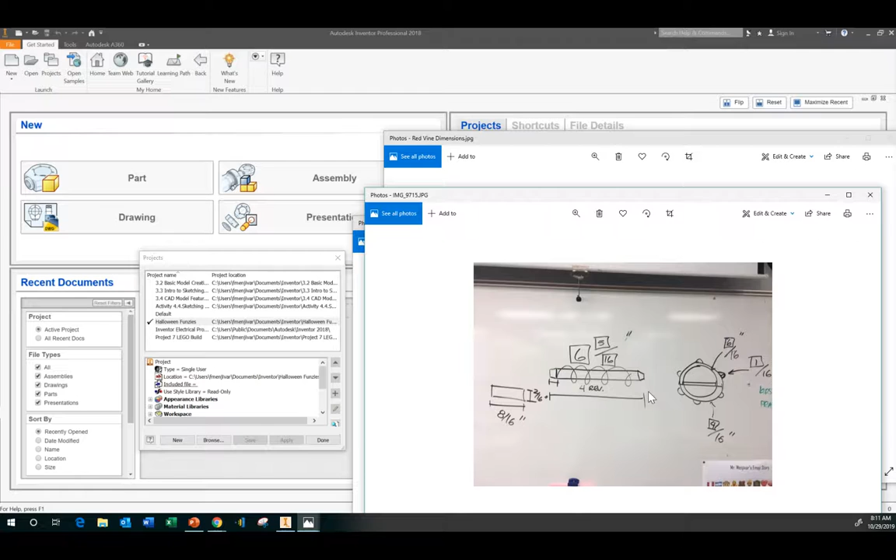Today we're going to be making the red vines, so I wanted to walk you through how that's going to work. Yesterday during class, we looked at some dimensions. During second period, we came up with these dimensions. During third, we came up with these. In the end, I went back, consolidated them, and settled on this.

I realized that in second period, I messed up and said 4 revolutions. It's 3. For the most part, you all agreed on the dimensions of the front; the outside diameter and inside diameter were really close, and same with the little nub. And the overall length was pretty close, so I just compromised in the middle for both of you. All right, so let's get going. These were the final dimensions.

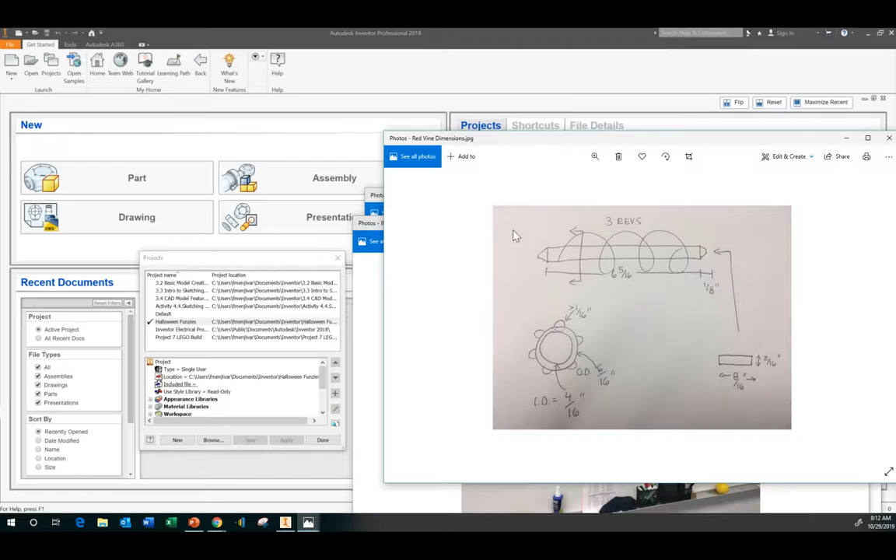One of the things I did is I first started with the Halloween Funzies project because I want to create a new project. I always create a new project anytime I start something new, so I hope you guys are doing the same thing. I'm going to start with a new part right off the bat, so I'm going to click on a new part to get that going.

The very first thing is, just so that I don't have to keep referencing the dimensions, I'm going to keep these dimensions up here. I'll keep them up during class. But why don't I do this? Let's start with inserting an image, actually. That way, I don't have to keep going back.

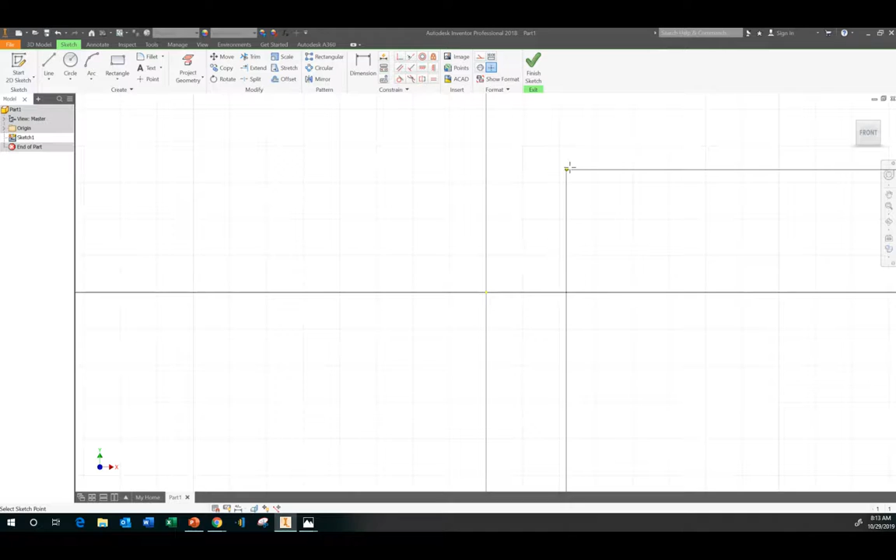In the meantime, I want to thank Corey Dusan, who gave me the idea for doing this. I think it's a great idea to 3D model candy. He does it in his class, and I appreciate the suggestion and advice on how to make these parts.

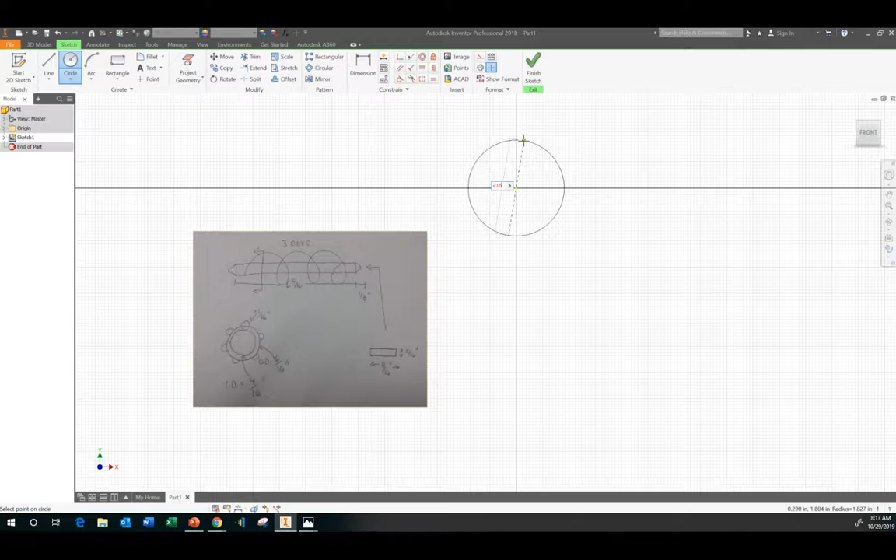Okay, so let's get going. First I'm going to start with this sketch. I'm going to start with a center point circle, and we agreed that it is 6/16 to the outside. Instead of even getting a calculator, I want to show you that you could just type in equals 6/16. So again, equals 6/16, and then hit enter.

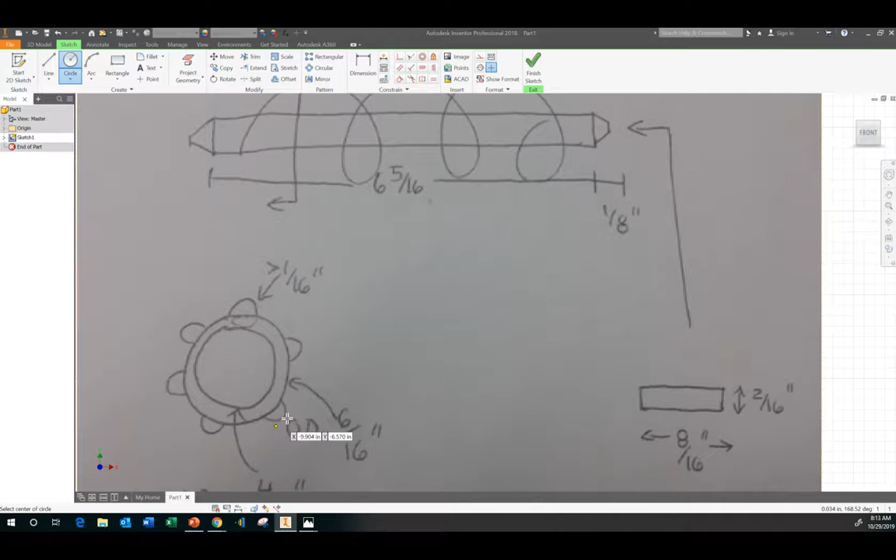Then I'm going to make a second circle, and it was 4/16. I'm going to zoom in and make a second circle, equals 4/16, enter. From there, I'm going to make an outside circle, and it's 1/16. You guys actually said it was less than 1/16 overall. Why don't we make the diameter 1/16 up here? I think that's a fair compromise. Let's see how that looks. Yeah, that's pretty good. All right, awesome.

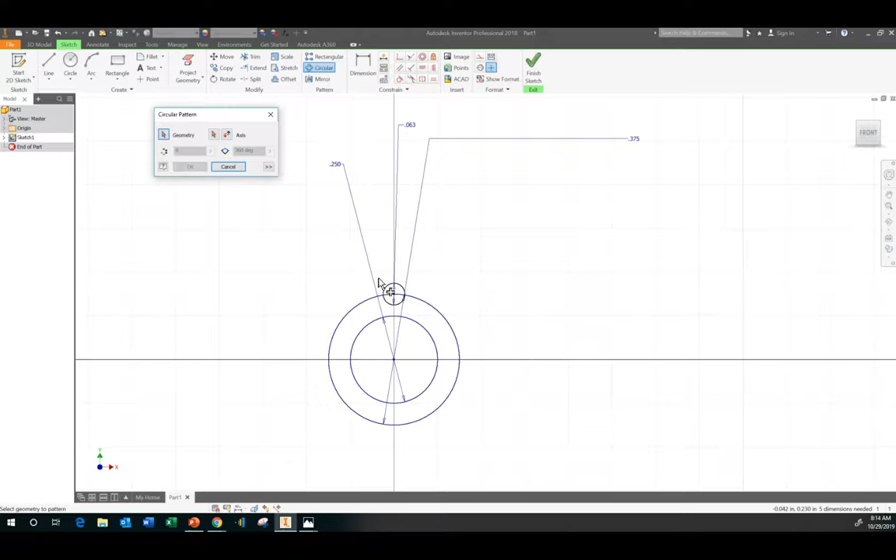Now I have my 3 circles, and you'll notice that it converted them into decimals without me even grabbing a calculator, just by typing it in. Great. From here, I'm going to do a circular pattern. This was a sketch feature that we learned. What do I want to circular pattern? The circle. Around what axis? The center axis. That's my point of rotation. How many do I want?

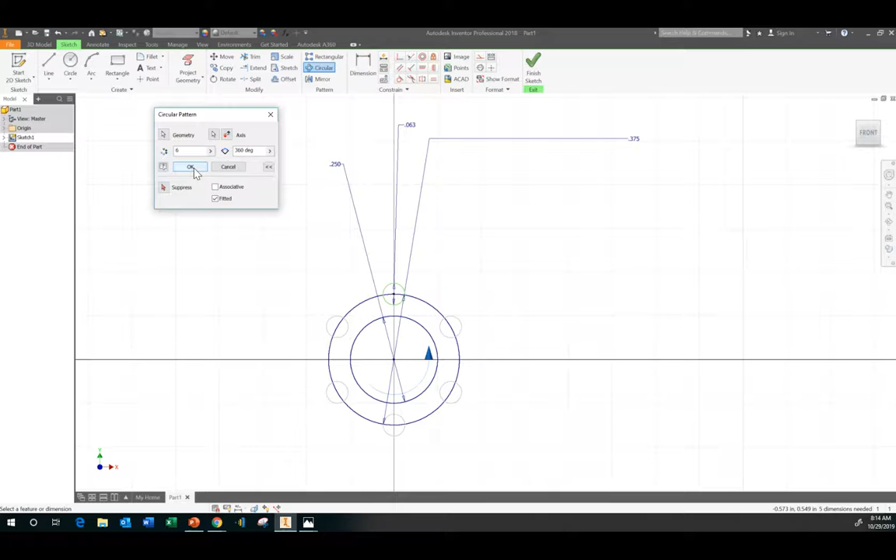I want 6. And one really important thing: don't make it associative. Associative means they're associated to each other, so you can't modify one part individually. If I wanted to trim this bottom, I couldn't do it because they're all linked together. So I'm going to make them each independent features by unclicking associative. From there, I can trim. I know it's a little repetitive, but I can trim each little part. Luckily, there's only 6 of them.

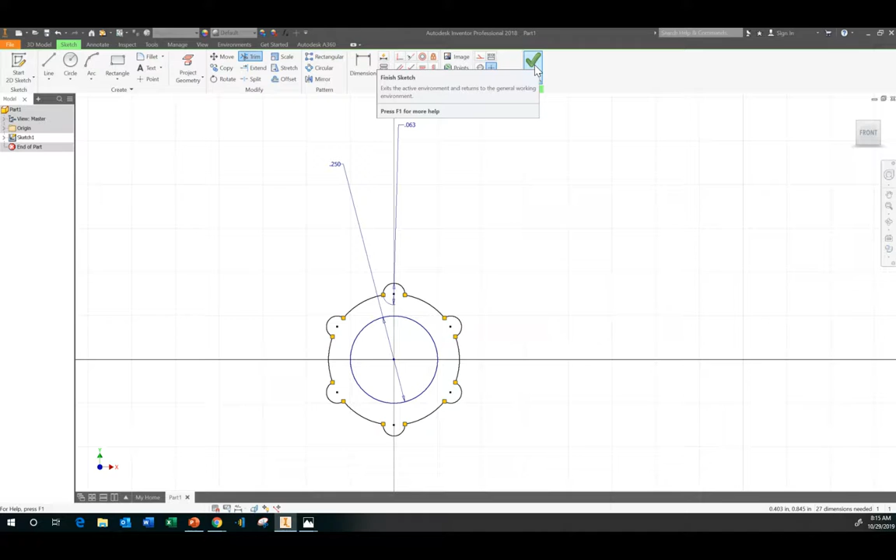Awesome. Now I have my shape. Now I'm ready to make this into a twirl with 3 revolutions. I'm going to use a feature called coil. Where is coil? I always forget. It's here. And it's going to ask me for the profile.

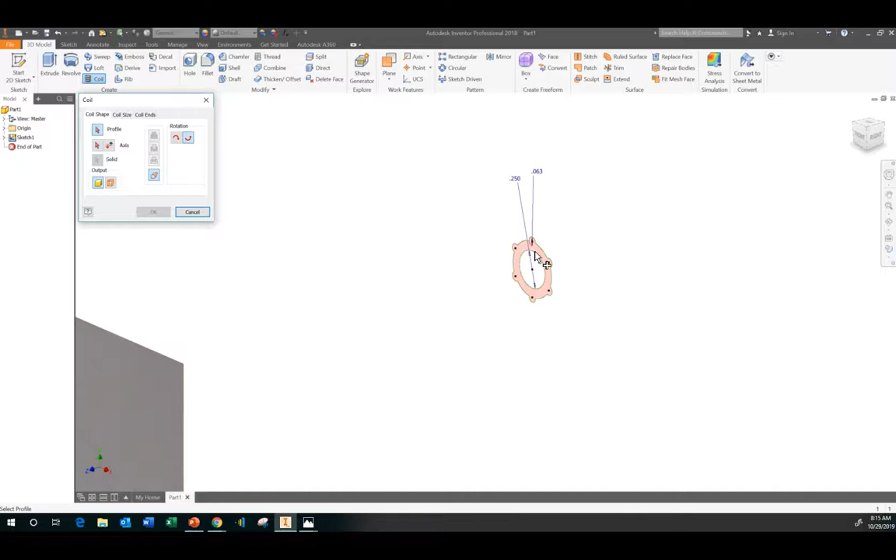I want this profile to wrap around, so I'm going to select it. Then the axis I want. Well, what does that mean? There are already 3 pre-developed axes: the x-axis, the y-axis, and the z-axis. If I click on the z-axis, I'll notice that's the one going down the center, and that's the one I want to coil around. The y-axis wouldn't make sense because that would go up and down.

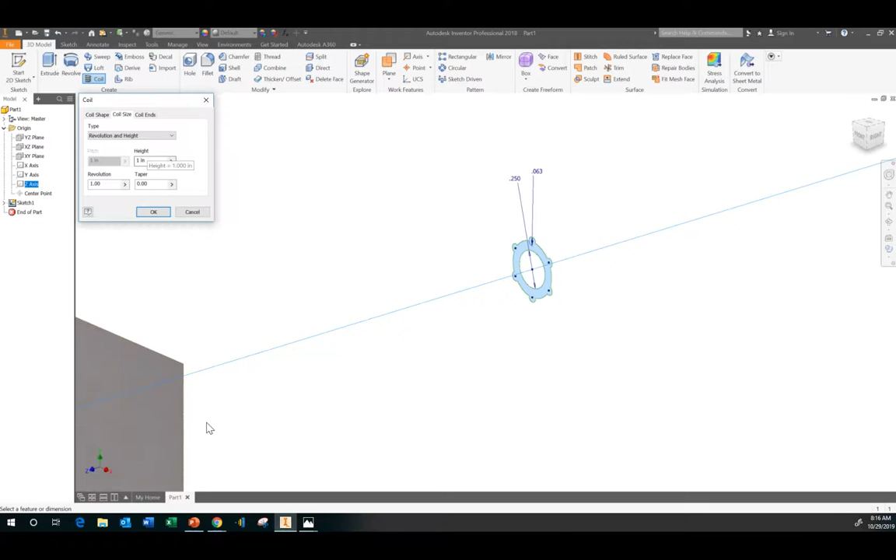It's not the right axis. In terms of the size, pitch and revolution, pitch means how far apart each revolution is. I don't know that. All we measured was, what did we measure? How many revolutions in the height of the part. So if I look at the part, we said it was 6 5/16. So I'm going to just type in equals 6 5/16. Oops. There we go. How many revolutions? I came to the conclusion that it was actually 3.

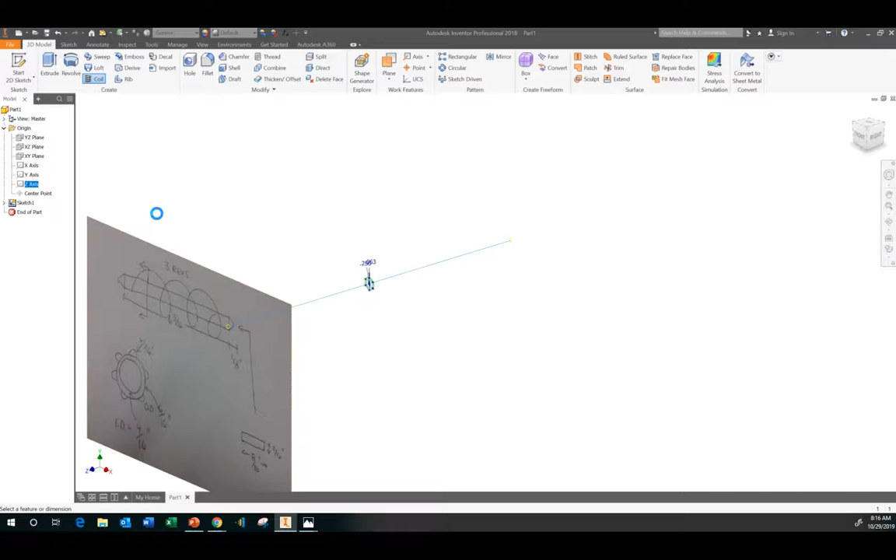And now let's go ahead and do that. And there we go. And we'll notice that the sketch goes away. So now I'm gonna have to reference the picture again if I want to. No biggie, I have it up here. So now we've accomplished this part. So this is probably gonna be new for some of you, but you have 3 planes that already exist, the YZ, the XZ, and the XY. And the XY is over there.

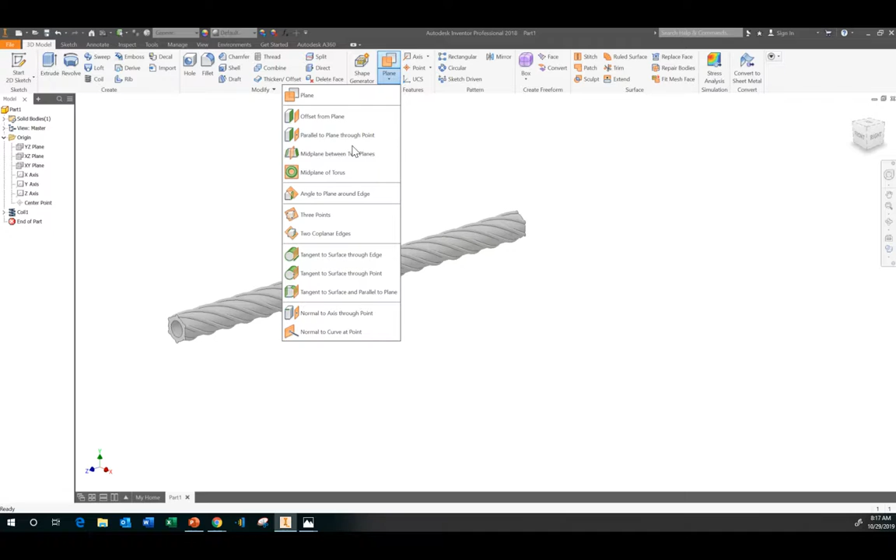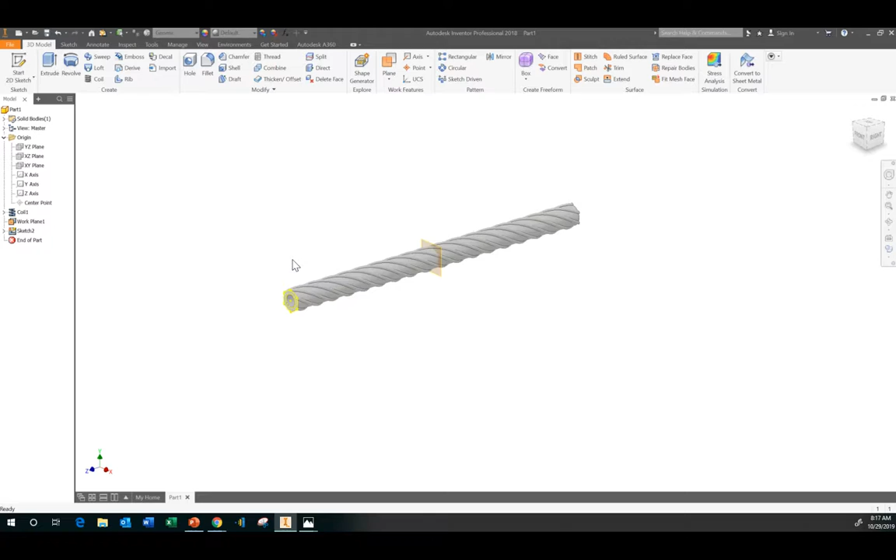So what I'm gonna actually do is I'm gonna create a new plane. And I'm gonna do this ahead of time. So I'm gonna create a midplane, and I'm gonna select this front face and this back face, and you'll realize it created a new plane right in the center. At the same time, I'm gonna start a sketch here, and I'm gonna project the geometry of this feature. All right, and you'll see why I'm gonna do that. Because what I'm gonna do now is I'm gonna create one more plane.

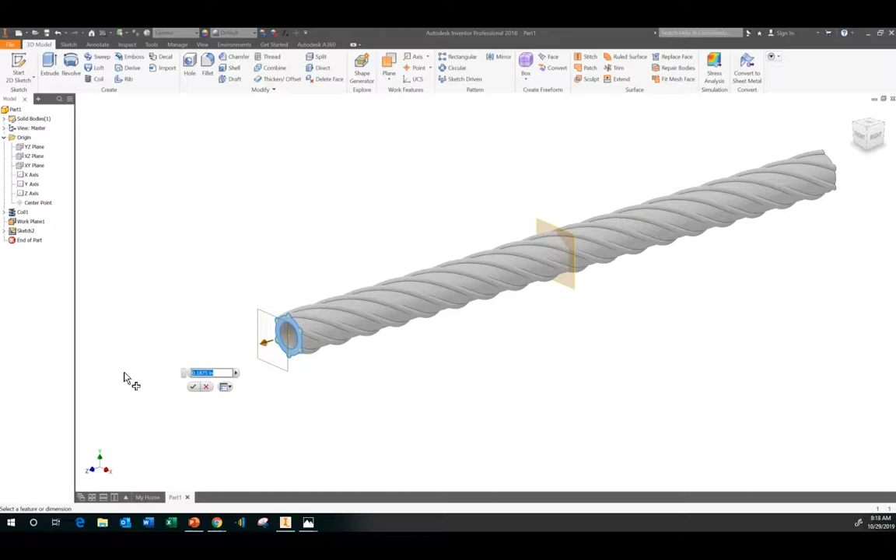So I select here, I'm gonna click the front, but one of the things you can actually do is if you just grab the plane, and I've let go of the mouse, but I haven't gotten out of the features. If I grab that plane that I just created, I can actually go ahead and, oh, I think I selected the wrong one. Okay, sorry about that. I said I could do that, but I clicked the wrong one. So let me delete this plane. I want to create a new plane that's offset from it. Whoops, offset from plane. So I want to say this one, and then I want to say how much I want to offset it. And I'm going to offset it 1/8 of an inch. Oh, I think I did that exactly right now. I'm going to click OK.

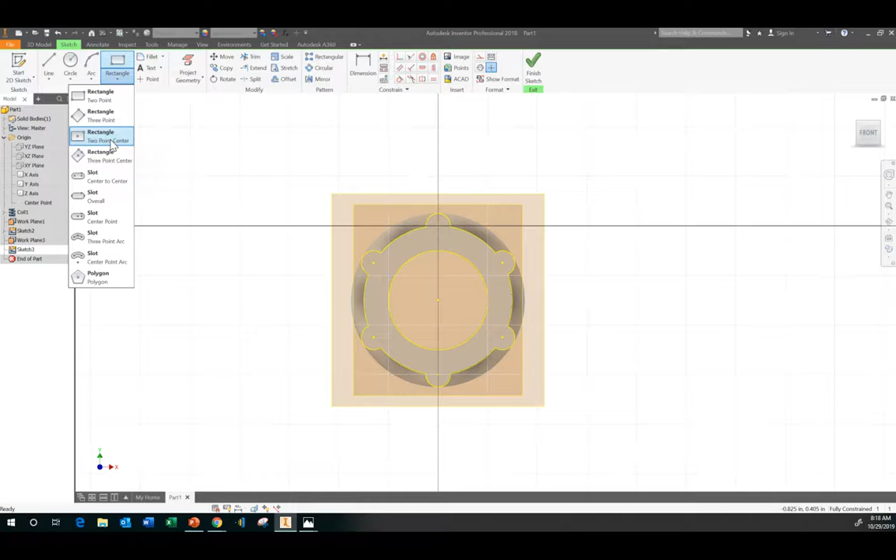Great. Now I'm going to go ahead and create a sketch on this plane. It's going to get me back to the front, but I'm offset from there. I'm going to create this little rectangle. Great. I use 2-point center because I know it's going to be centered. So what did we say? It was 8/16 in that direction. I hit tab, equals 2/16, I think you just said. Hit there. I'm going to finish the sketch.

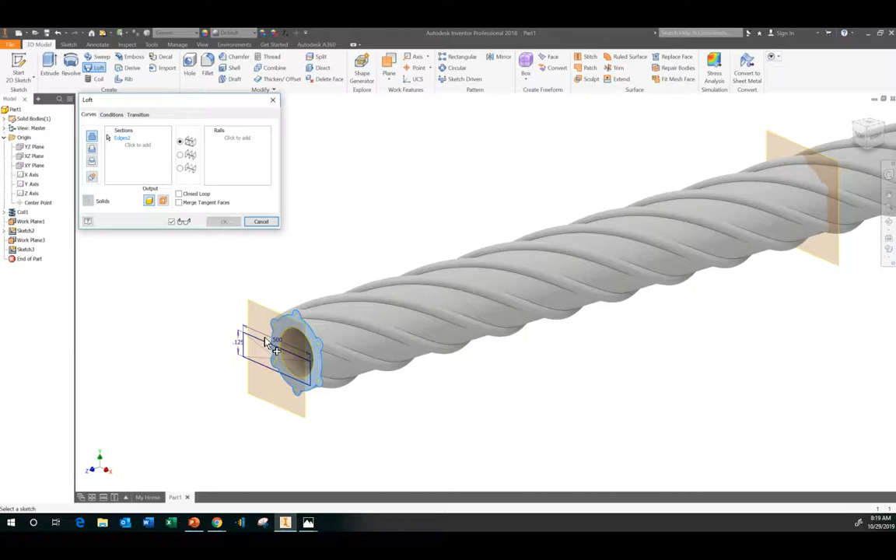And I'm actually now going to loft. So I'm going to loft from this projected sketch. I had to have projected it in order to loft it. Oh, man. I clicked on the wrong one. So let me delete that. I'm going to again select this outside face. There we go. And I'm going to loft it to there. And I'm going to click OK. Awesome. That looks pretty good.

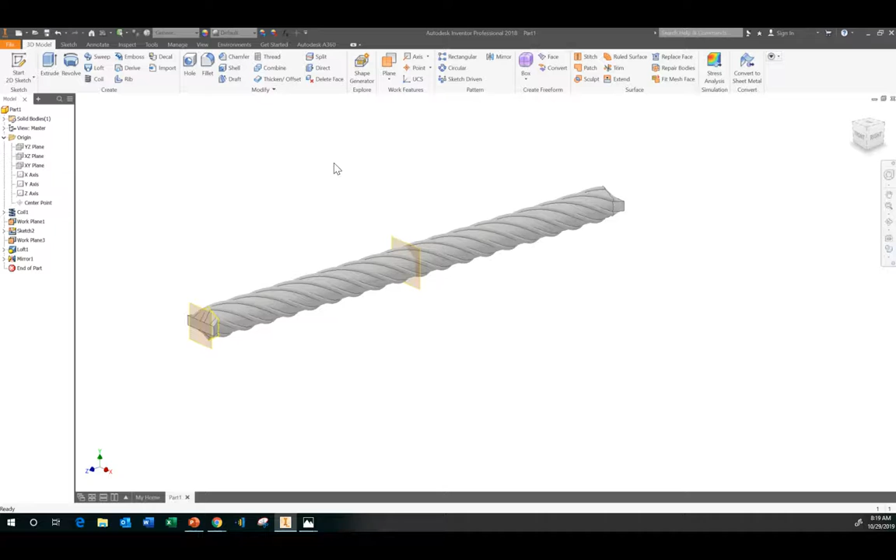And now the reason why I created this midplane is because now all I want to do is mirror it across to the other side. So I'm going to do a 3D feature mirror. I'm going to select which feature. What's my mirror plane? It's going to be this center plane. I'm going to click OK. And there we go. It's looking real good. I think we're done. One thing I can do is I can hide the visibility of these planes so that it looks a little more realistic. I'm going to hide the sketch that the project geometry is on.

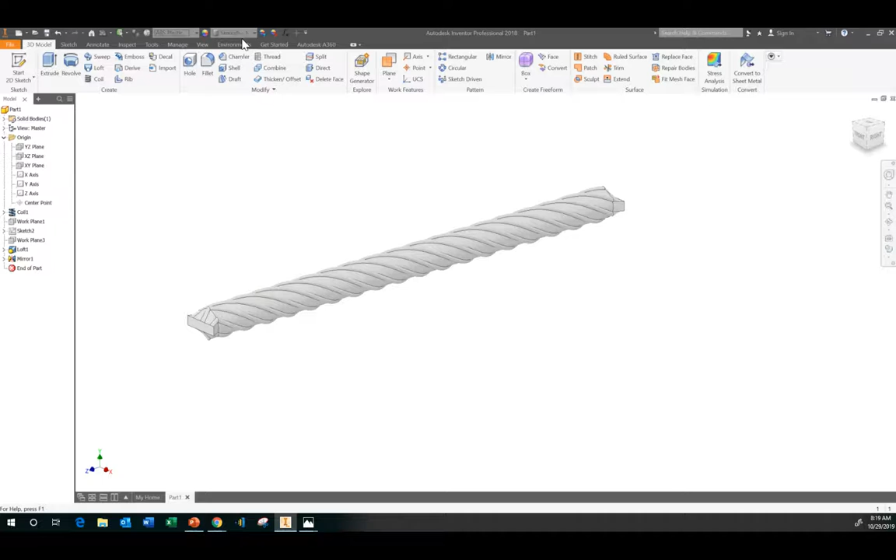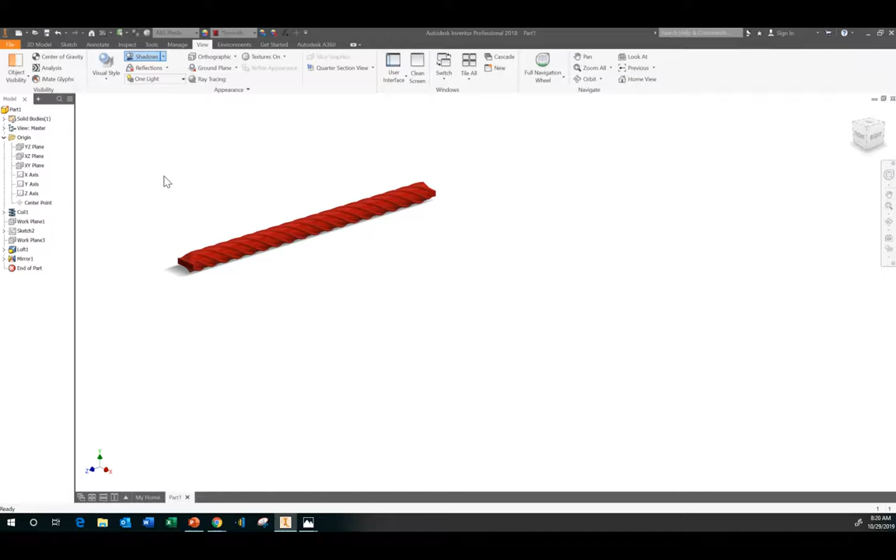And now what I'm going to do is, why don't we make it ABS plastic so it's shiny? Why don't we make it red? I'm just going to type in red and let's see what options I have. Oh, smooth red. I like smooth red. That's good. I'm going to go to my view tab and I'm going to put it in realistic mode. I'm going to throw some shadows on there because I always like to do that. And I'm going to put it in a 1 light room. And there we go. And now I've made my red vine. I think it looks pretty good.

Great job, group. I like your dimensioning. I think you guys did a great job with it. I'm going to make it swirl around for a while. I don't know why I picked that way to swirl it, but let's go for it. Makes you want to just bite it out of the screen. All right, awesome. Great job.